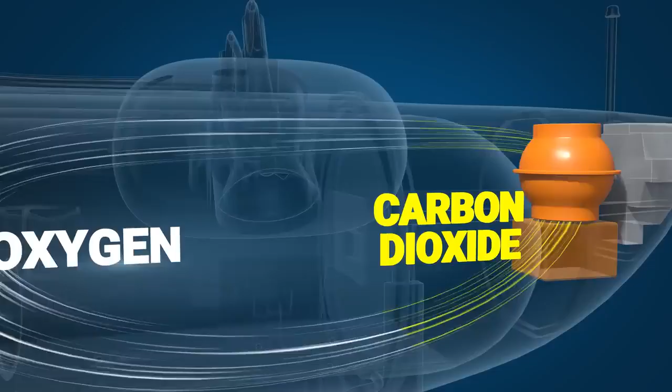In this video, we will be examining the engineering behind this submersible vehicle, which is used primarily for exploring the wreckage of the Titanic and the scientific research for data collection. Moving into the interior is the game controller that will be used for piloting the vessel. Tilting or pushing the stick like this results in the forward movement of the drone.

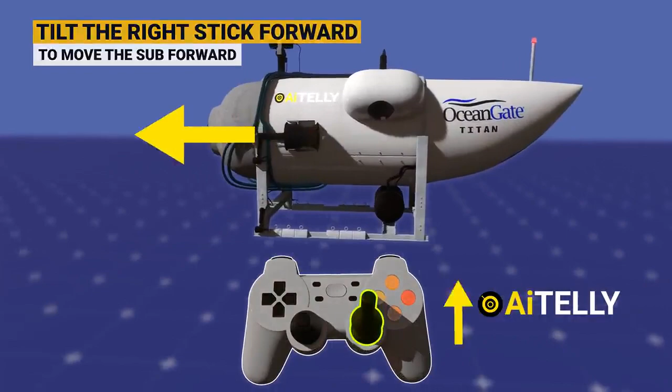We will also be looking at the step-by-step process of how this drone works and the various versions of what could have happened. Is it implosions that occurred deep down in the ocean depth, which shattered the Titan vessel into 5 various parts or debris? So stay tuned and don't miss a beat.

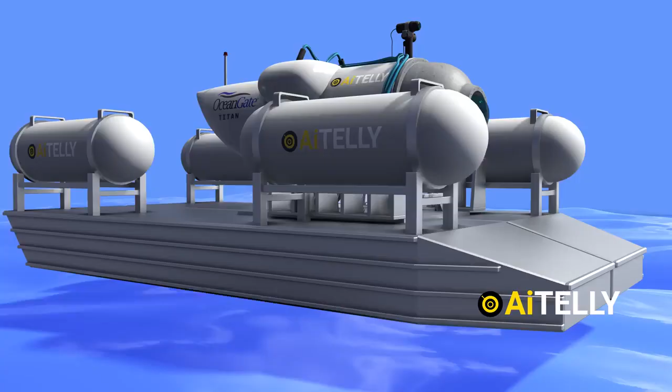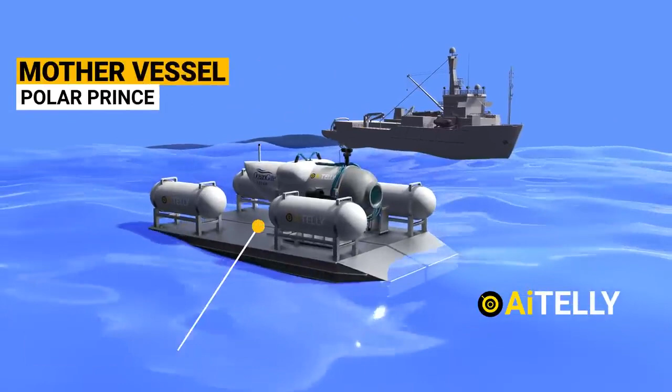OceanGate Titan. This is not a submarine, but the Titan is a Cyclops-class manned submersible. But what's the difference between the two? The primary difference between a submersible and a submarine is that the submersible is launched from a mother vessel or home vessel. They are typically launched on a raft or platform, which is placed into the ocean, and ultimately descends via 4 electric thrusters, which helps it to reach speeds of around 3 knots.

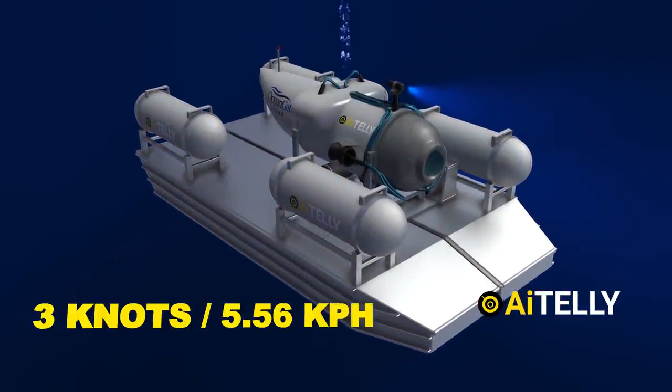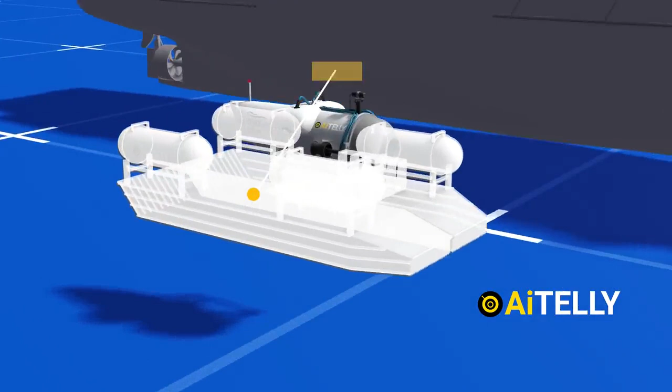But a submarine can dive underwater without any external equipment and surface all through the process of buoyancy. These are the basic systems that make up the submersible. Number 1. The mothership named the Polar Prince, which is actually an icebreaker. Number 2. The ramp that transports the vessel down to a certain depth. Number 3. The OceanGate Titan itself. Let's look at its specification.

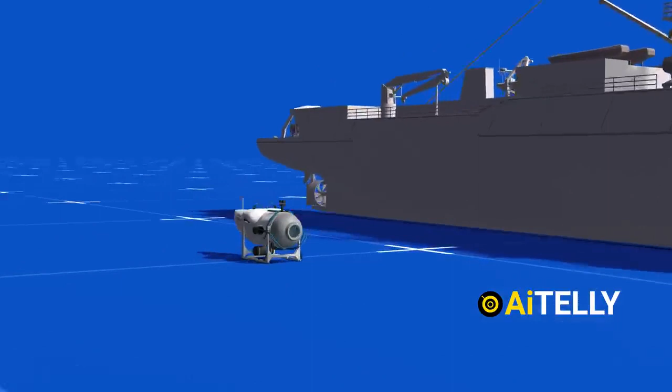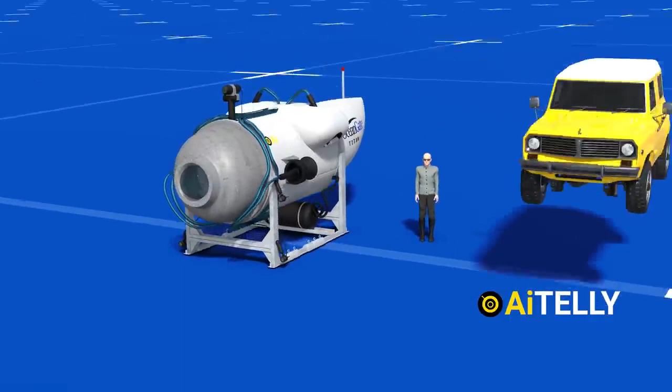The vessel has a length of 22 feet or 6.7 meters, which is pretty small considering it can go to great depths, while it has a breadth of around 9.2 feet or 2.8 meters. And it has a height of 8.3 feet or 2.5 meters. Comparing this to an average human will help us visualize how small it is. Even better, let's compare this to a small SUV to help us understand its dimension better.

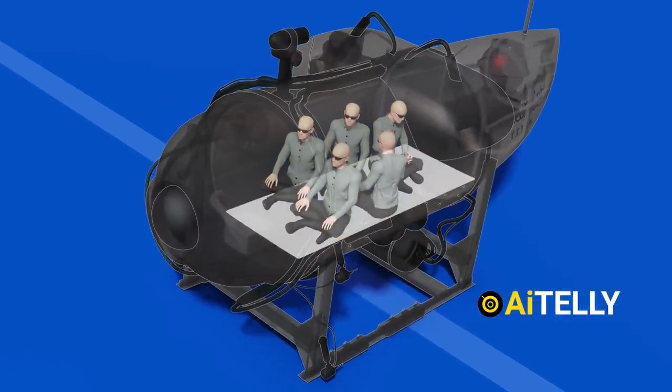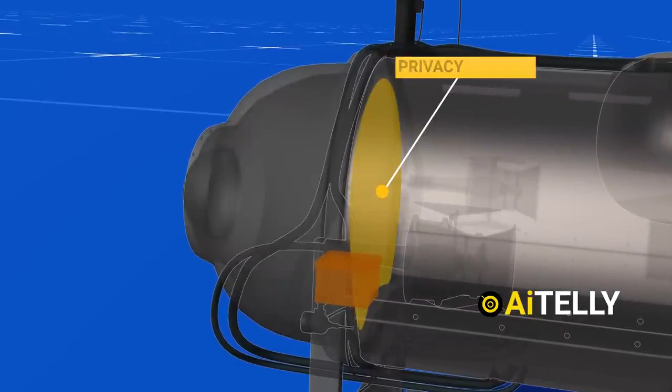Interestingly, it can carry around 5 people, a pilot, and 4 passengers, who have to sit on the floor and have limited room to move around. Imagine sitting like this for 8 hours. If someone asks the question, what if nature calls? Yes, there's a toilet on the submersible, but it is only separated from the rest of the capsule by a privacy curtain located at the front of the submarine.

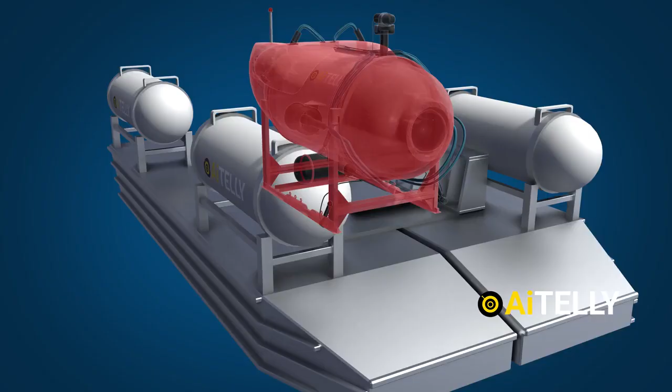The interior of the vessel is pretty simple. You will have a joystick, which is actually a video game controller, and 2 monitors to help steer the vessel. One is for the sonar, and the other one placed on the side is for steering the submersible. This is probably one of the most basic deep diving submarines you will ever see. Let's move outside the submersible to understand the engineering behind it.

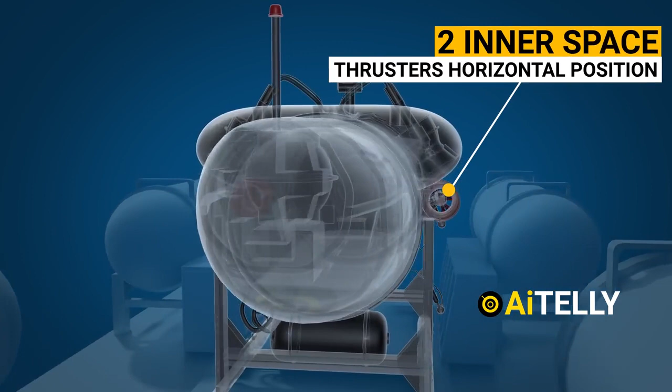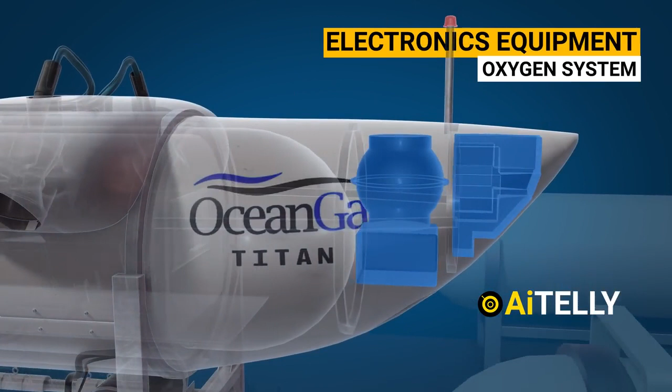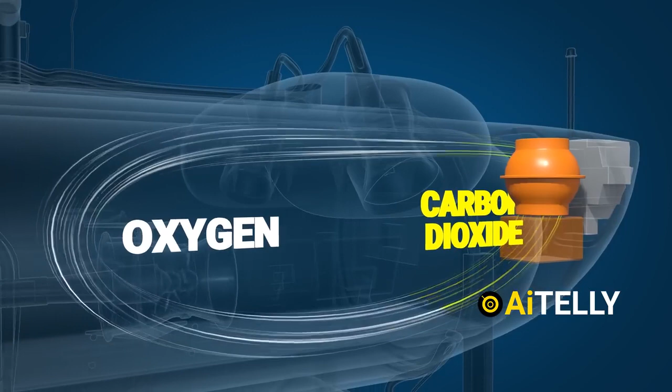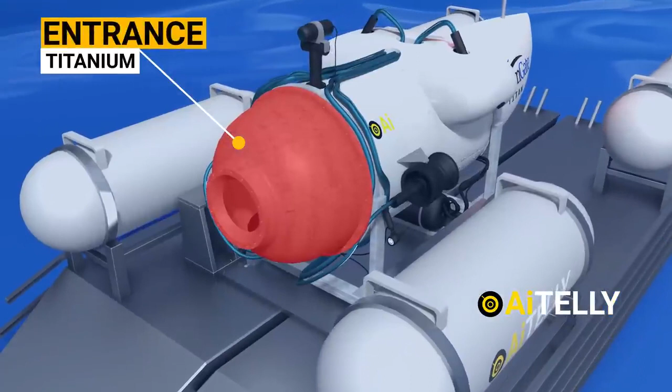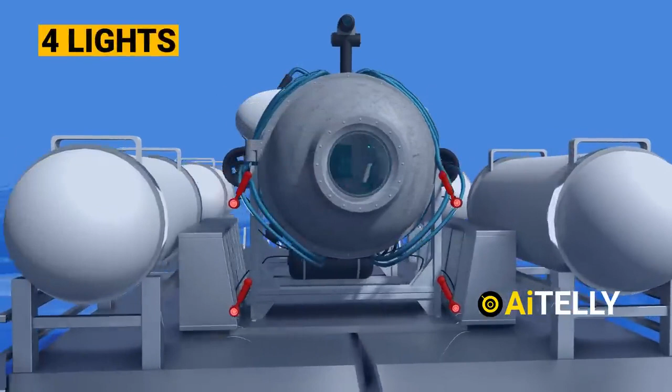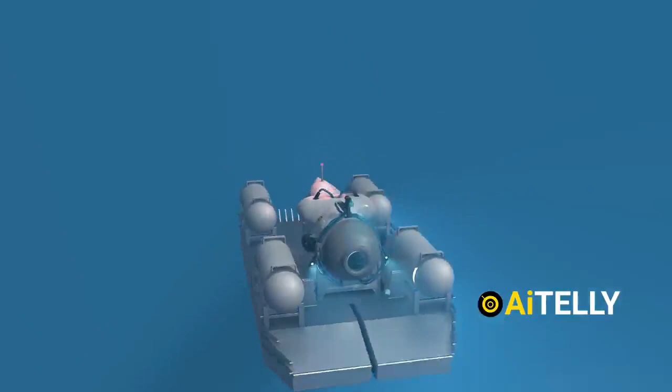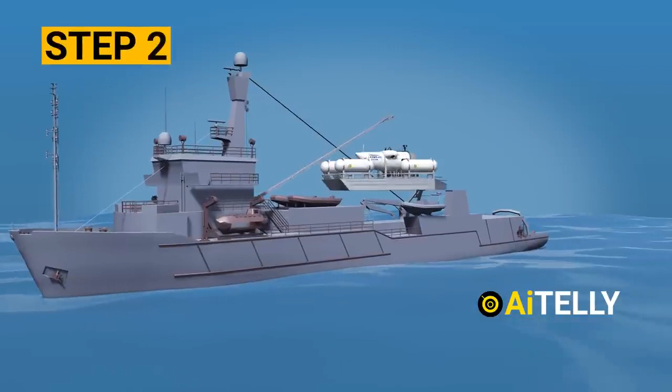Step number 1. The mothership, which is the Polar Prince, anchors at a particular spot where the Titanic shipwreck is located. Step number 2. The ramp slowly disembarks from the mothership along with the Titan submersible. Step number 3. It will slowly descend to a certain depth. Step number 4. The small Titan submersible will disengage from the assigned platform. Step number 5. Titan will slowly descend at a low speed of 3 or 4 knots. Step number 6. The pilot will use the joystick to pilot the vessel. This is how it works.

Moving the joystick controller just like this will propel the vessel forward. Tilting the controller back will reverse the vessel with the help of the electric thrusters. If the pilot wants to turn left or right, he will just have to twist the controller and the effects will be as shown in the animations. On the left-hand side of the joystick is the down and up controller. Tilting the controls forward results in the downward descent of the vessel, and pushing the controllers down results in the upward movement of the vessel.

Let's look at 5 scenarios through the animations of what might have happened to the OceanGate Titan submersible. Version number 1. The primary objective of the submersible was for tourists to explore the Titanic shipwreck hovering over it, an experience only a few people were able to achieve. And while doing so, it could have been tangled in the wreckage of the Titanic. Version number 2. The battery might have ceased, since it requires it for the 4 electric propellers to operate. Version number 3. Due to the extreme pressure in the dark ocean's depth, the only glass present in the vessel might have cracked.

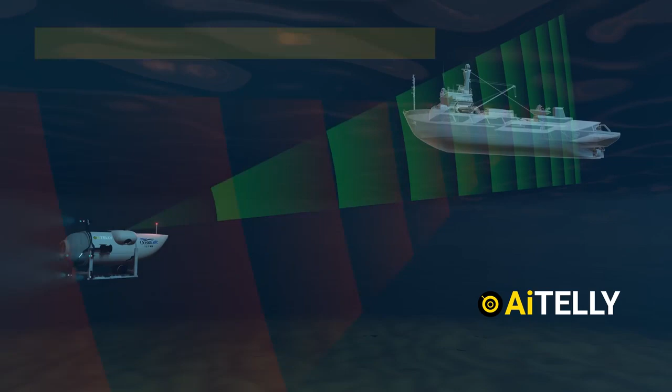Version number 4. The submersible communicates with its mother ship using a sonar system, and it could have been damaged while traveling halfway towards its destination. Since it does not have any navigation system, the vessel might not be able to steer away from danger. Version number 5. We hope the submersible would have resurfaced, but since it could only be opened from the exterior, this would have been an issue to communicate with the rescuers. But we believe, according to reports, there was an implosion. And the debris is located just 1,600 feet from the Titanic and consisted of 5 parts as shown here in the animations.

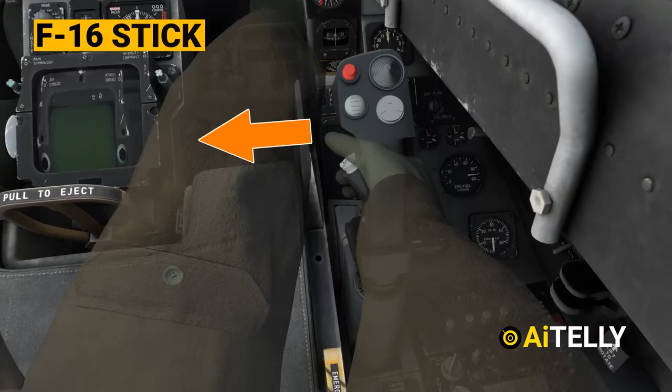This is the interior of the F-16 fighter jet. On the right side is the stick with all its functions. Interestingly, it moves only 1/4 of an inch, but don't be fooled by its limited motion, as it can turn this plane in any direction. Just like this, if you move the stick left, the aircraft will roll to the left.